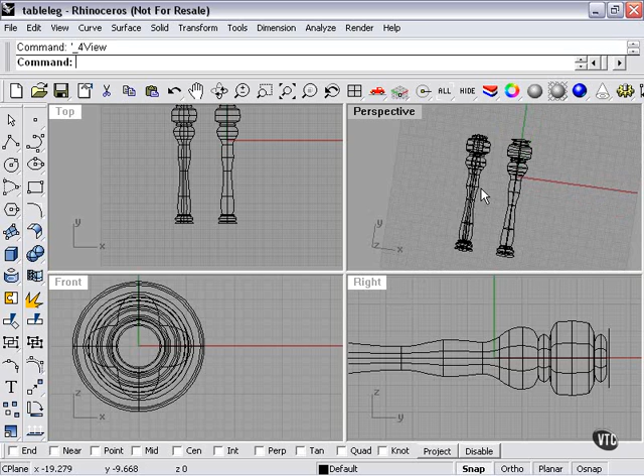At this point, we have created our table legs. We're choosing to go with the fancier one. So now I'm just going to do a few more adjustments, and I'm going to delete the other table leg.

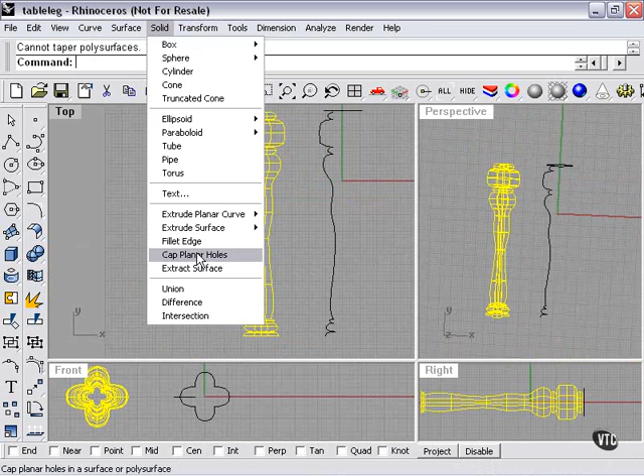Let's go to Transform, Taper. It says cannot taper poly surfaces. What we can do, however, is cap the planar holes. That gives us a nice flat and finished look.

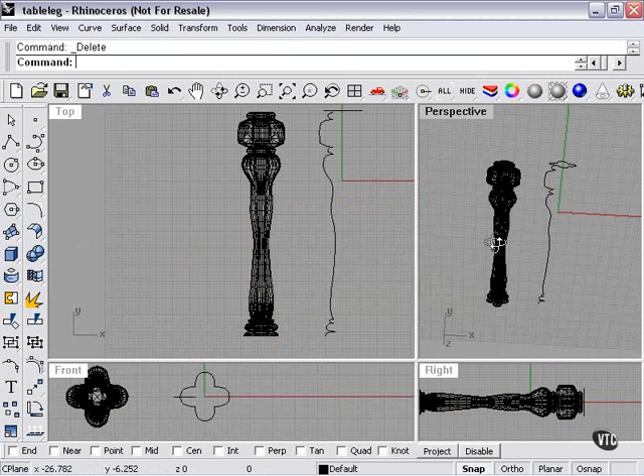Then I can go to Tools, Polygon Mesh, from NURBS Object. We'll crank our density down a little bit, press OK. I'll delete our original. So now we have a polygon mesh version of our table leg.

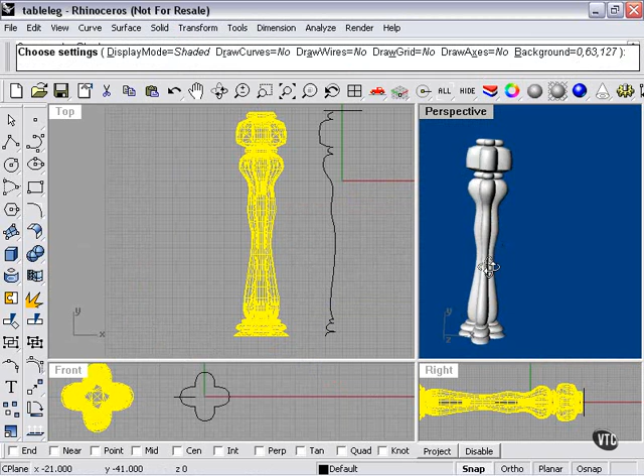Now we can go to Transform and Taper. I thought we might want to make the base just a little bit wider. So we'll do just that. And let's take a look. Now we have a stronger sort of Gothic looking table leg.

Now what I'm going to do is select our table leg, press Ctrl C to copy. I'm going to go to File, go to my recent files, choose Table. Should I save changes to table leg? We're going to say yes. Scroll out, press Ctrl V.

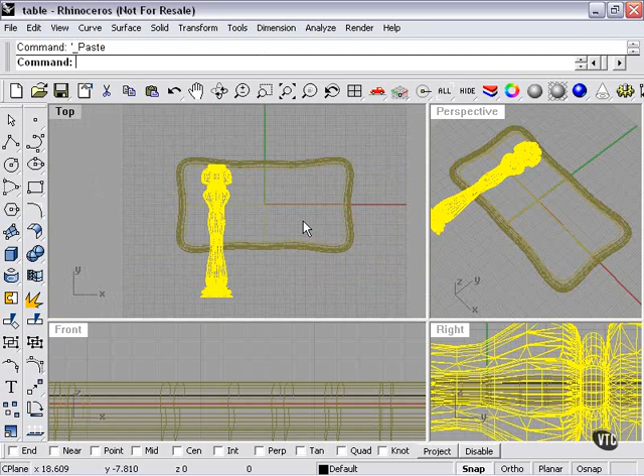The table leg is now in the table scene. First thing you'll notice is it's lying down the wrong way. We have to rotate it 90 degrees. So the easiest way to do that is turn on ortho. Then we can turn it off again.

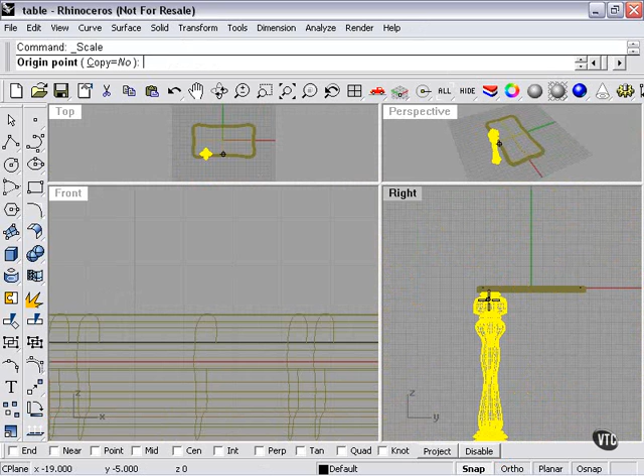We'll maneuver it. Now we're going to need a three-dimensional scale here. This is going to need to be smaller, all 3 dimensions. So I'll crank it down like so. And that's probably a little bit too small, so we'll come back up a little bit. And let's try that.

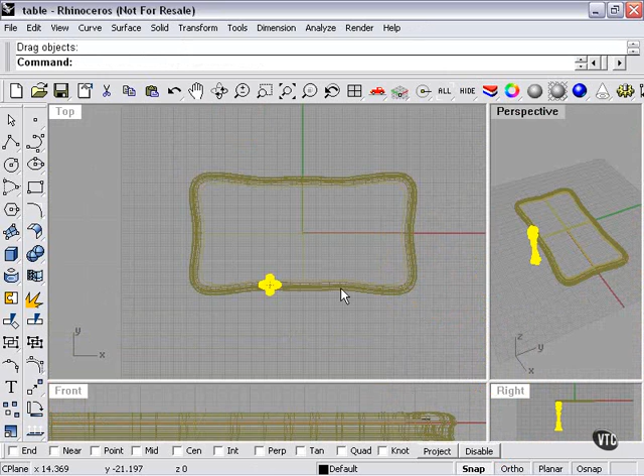Now in my top view, I'm going to place my table leg. And let's try about right there and have a look. Before we do that, we may want to change our color to Other.

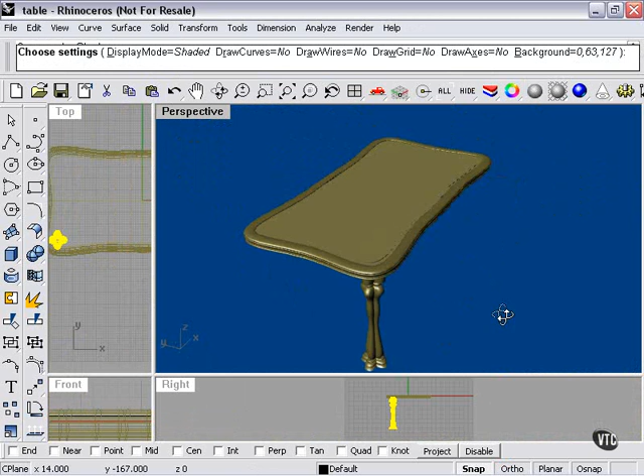So here's one of our table legs. And now is when our mirror tool comes in handy. Transform, Mirror. I'll just go to my center axis here. Make sure I'm on this green line because that's the center of the table. Left click, then move the mouse down slightly. As you can see, that places one over here.

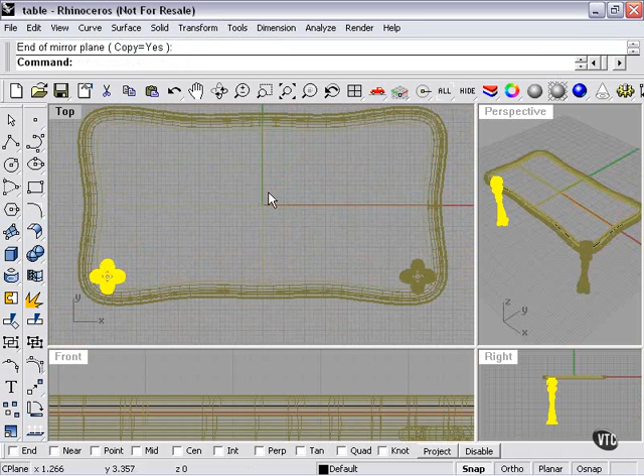That looks good. Now I'll select both. Right click to repeat my mirror tool. Select the center, move the mouse around until I see them appear in the opposite corners. And now we've placed all 4 legs, and we can be sure that they've been placed correctly.

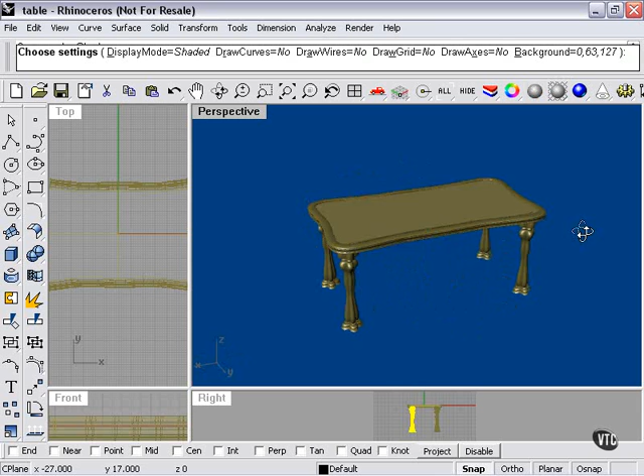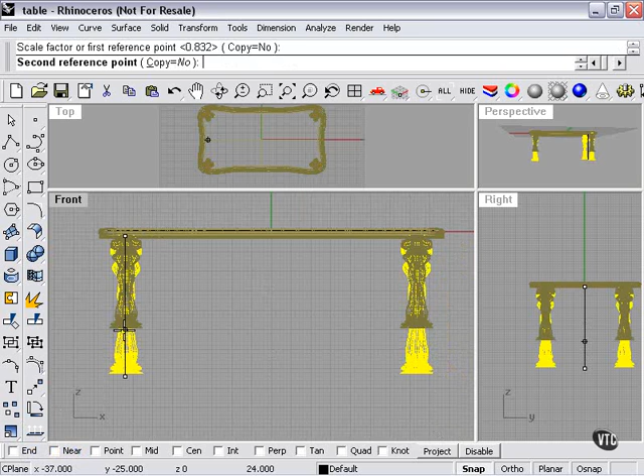As a finishing touch, what we can do, select all 4, going right to left. As you can see here, they look a little bit long. Go to my scale tool, one-dimensional scale, from top to bottom, raise them up a little bit. Let's take a look yet again. And so that's a little better.

Our dining table is now complete. I'm going to save the changes.